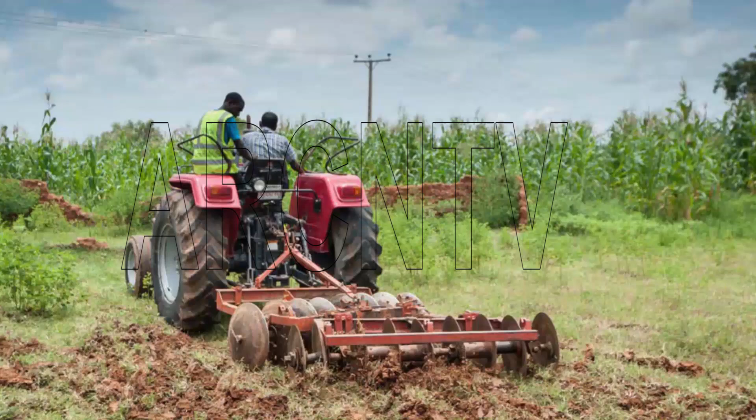You can't drive agriculture without mechanization. It's often said that agriculture is the vehicle, but the wheel on which the vehicle moves is mechanization. So without the wheel, you have to be dragging the vehicle, which is almost impossible to attain.

So when we look at vulnerability to climate change, without mechanization you cannot introduce or make use of precision irrigation facilities, especially during the dry spell that we even experience during rainy season.

If you think that the crop you want to grow is one that doesn't require much water, like melon for example, people grow melon as early as the rain starts. But I witnessed sometime last year that melon even went dry on the field. So it's so difficult these days, almost impossible for you to farm without considering irrigation or an alternative source of water for you to get your best yield.

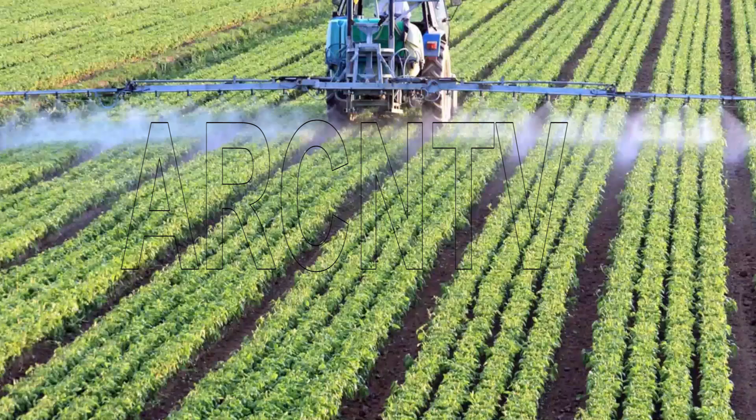And this is why mechanization is possible to tackle the menace of climate change, and the inability to compete in global markets. When you don't mechanize, obviously you can hardly produce for local consumption, not to talk of export markets. So in this wise, countries that have the advantage of mechanization have the upper hand.

And it is sometimes said that the reason for poverty in developing countries is as a result of lack of mechanization. So there's the need for us to be able to produce for local consumption as well as for export, to look at mechanization to tackle this, to be able to compete in the global market.

And I want to look at the high labor costs too. There is always peak demand of labor during peak farming seasons, which makes labor costs very high. But I still look at availability of labor as a hindrance for us to mechanize our agriculture.

Because we still have access to farm labor, that's why we don't seem to be so serious about mechanization. In Japan, the dwindling population of farm labor was what led to the mechanization revolution in Japan then. So just imagine a scenario where you don't have labor to work on the farm - what will you do? Even non-engineers will start to develop mechanization tools and equipment for their farm.

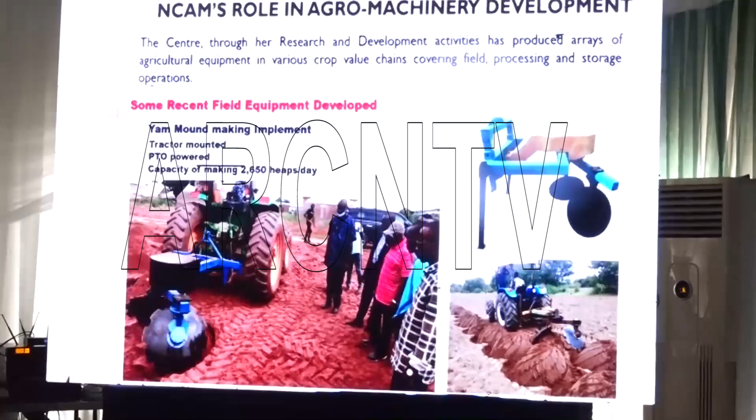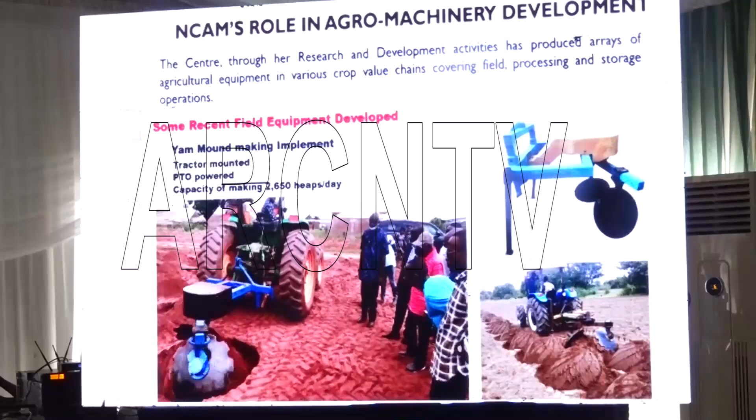This is the yam mound making machine that was developed some 3-4 years ago at the directive of the then Minister, Chief Audu Ogbe, who is from the yam producing part of the country. General Obasanjo saw it on our website and demanded a few units for his farm. We took it to the farm for evaluation, and it was on the farm for hours. He gave us a letter of recommendation on this, as you can see.

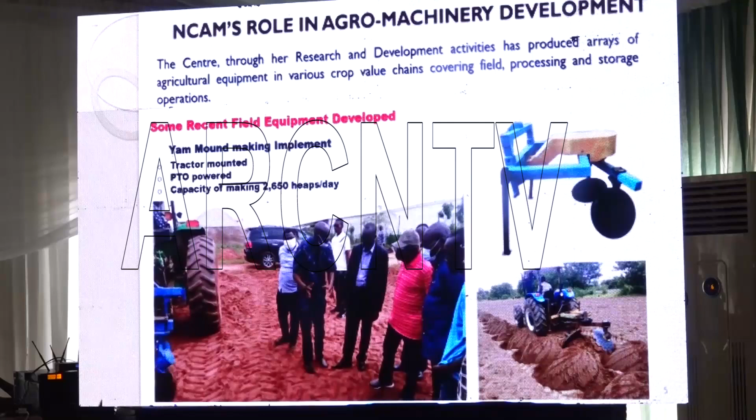Now we have seed planters too. This is the 3-row seed planter, and this is the multi-seed planter. The advantage is having a planter with multiple uses for maize, cowpea, soya beans, sorghum, and so on. So this is the planter.

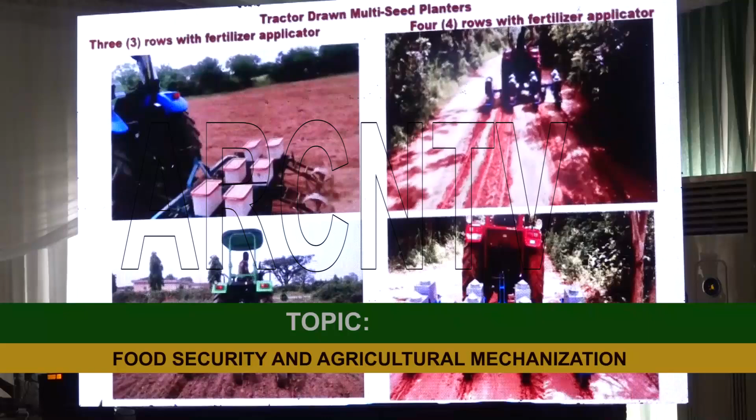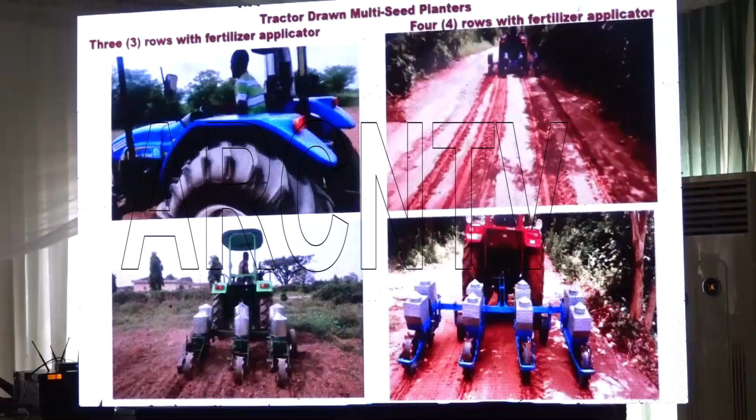We will keep improving on our technologies. And when we extend our technology to you, backup services are always there. Be rest assured that if there's any issue, we are there, and even if there's need to replace such a machine, we are also there.

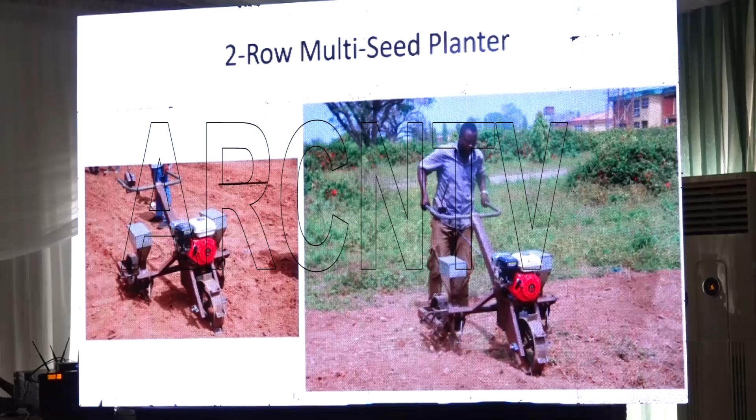For the various levels of mechanization, we have the 2-row multi-seed planter, as you can see, and we have the 15-row rice seeder for large-scale rice farming as well.

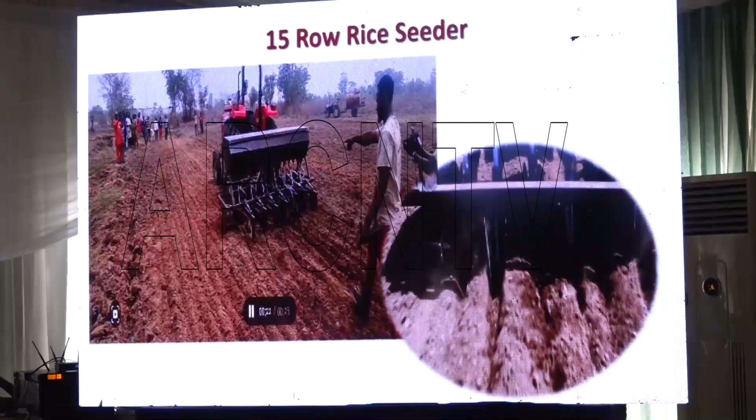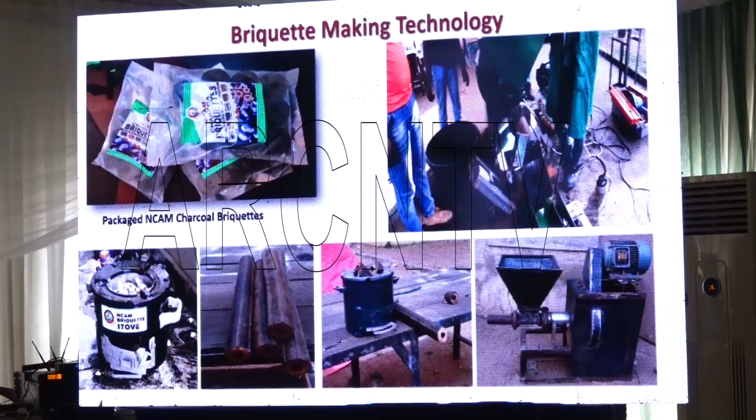This is our briquette making machine, the one you saw outside. Because a lot of agricultural waste is generated during harvesting of crops, and it constitutes a nuisance sometimes, we convert this into briquette, which is a solid fuel. This assists in curbing deforestation where you'd otherwise depend on charcoal from cutting trees in the bush. You can use agricultural waste to generate these briquettes and use them for smoking fish.

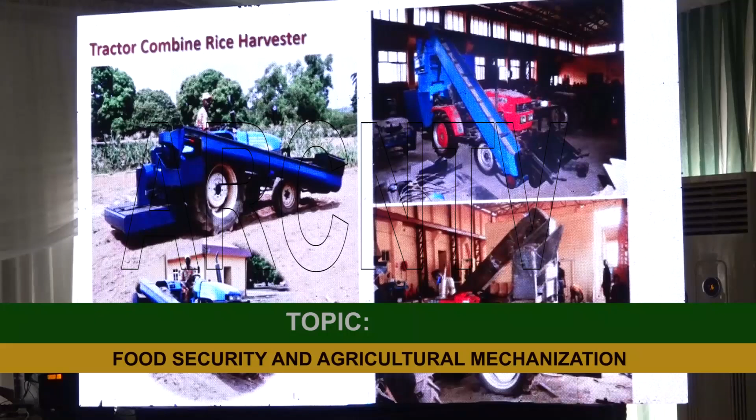Now, coming to harvesting, a lot of people have problems, especially large-scale farms, now depending on imported combined harvesters. We see the challenges with this combined harvester: the technical backup services are not always there, and whenever these combined harvesters develop faults, that is where they end their activities and useful life.

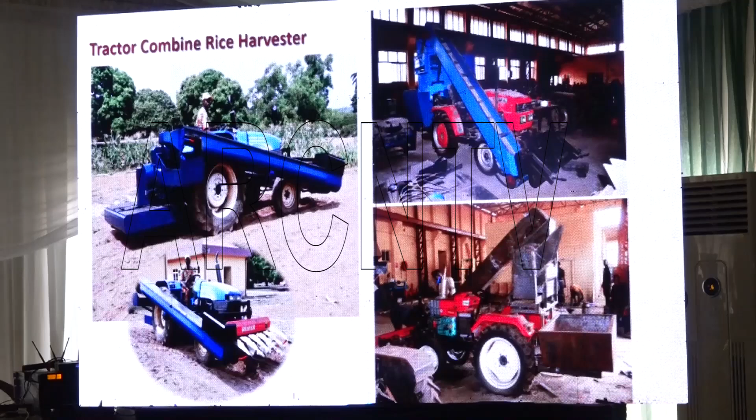So we come up with a tractor combine that can harvest rice just using the conventional tractor, which is easy to maintain and repair. You work the reaper on it, the conveyor, and a thresher at the back. All these other components are locally produced, so the maintainability of this kind of system is well guaranteed compared to the imported, very expensive and sophisticated combine harvesters. This is our initiative on this.

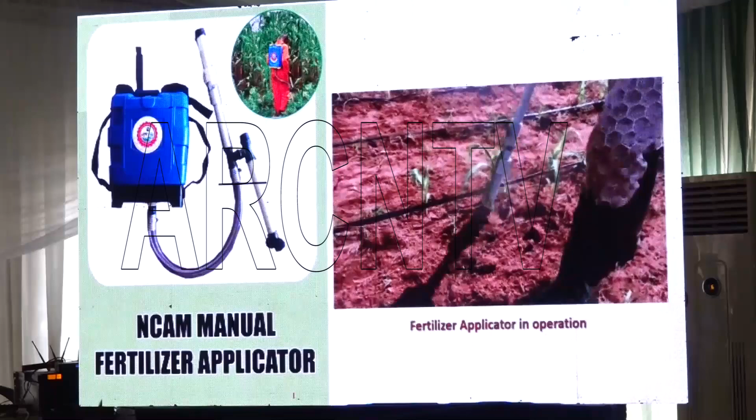This is a fertilizer applicator that at least prevents you from having to bend down to apply your fertilizer. You can adjust the quantity that comes out from it.

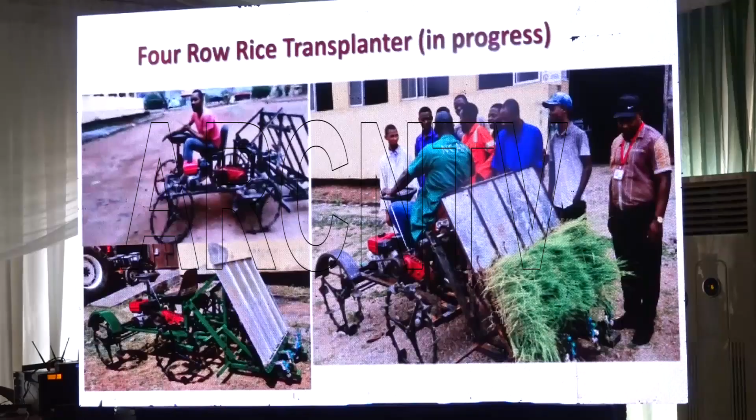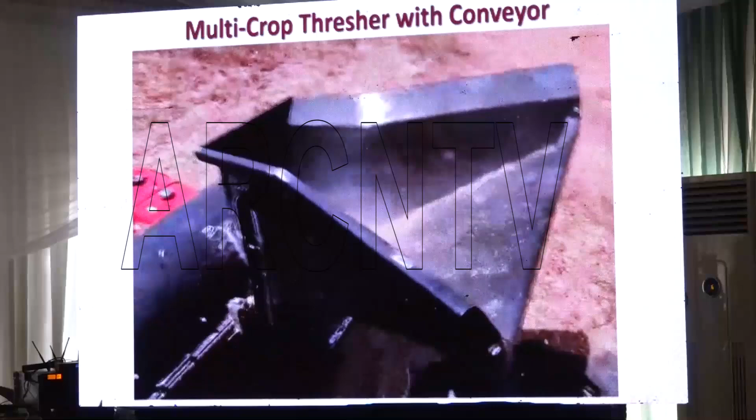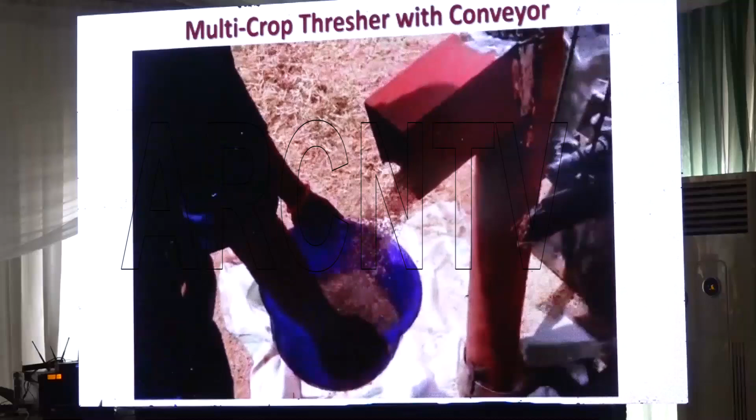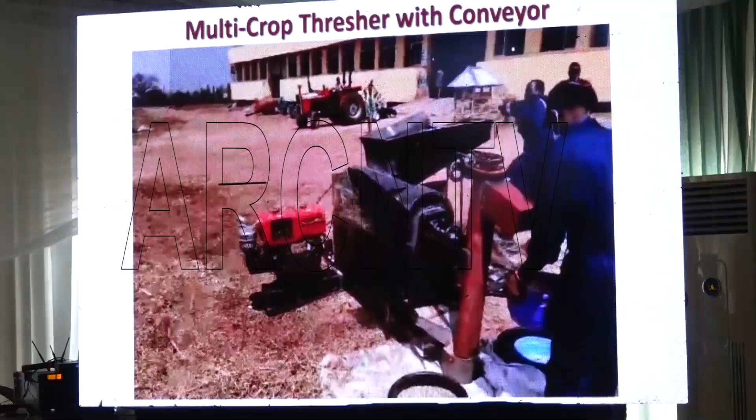Here is the multi-seed, multi-crop thresher. This thresher has the capability to thresh up to 6 different crops, and this is tested and proven. It has the cleaning section too, and also a conveyor that will enable you to collect your seed from a standing position. You can hang a sack there to collect your seed. This can do up to 2 to 3 tons per hour. As it is, we have tested this, and it's already been popularized, and we have demand for the production.

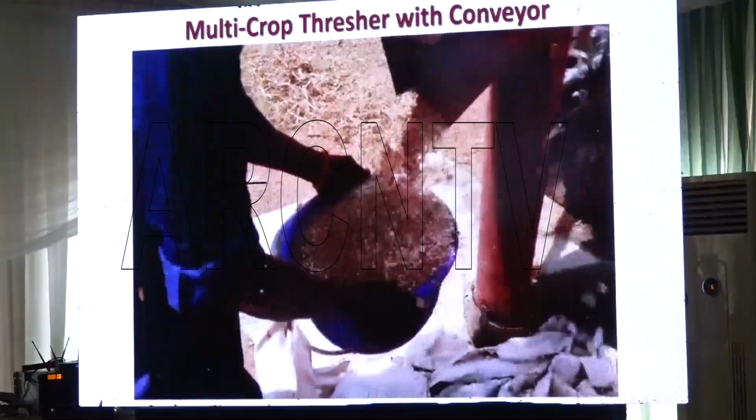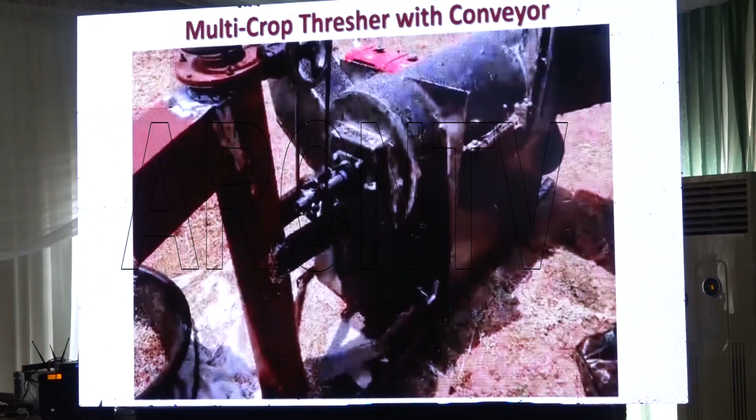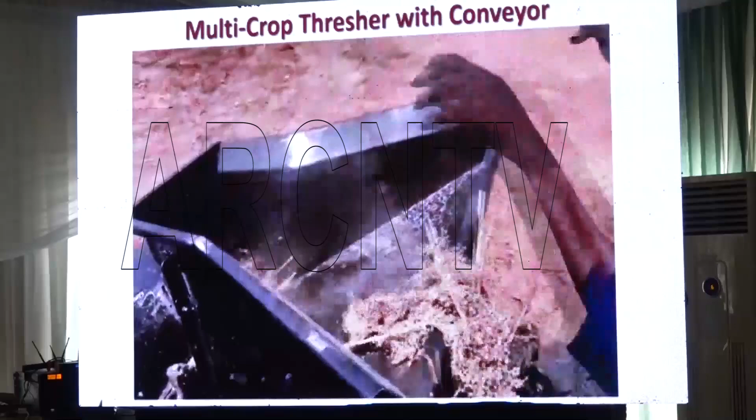It will get to a point that the center may not be able to handle the demand for the production. And that's why we come to training of fabricators across the country, so as to at least make them know how to produce this in their various locations, creating a ripple effect in commercializing these technologies that we have.

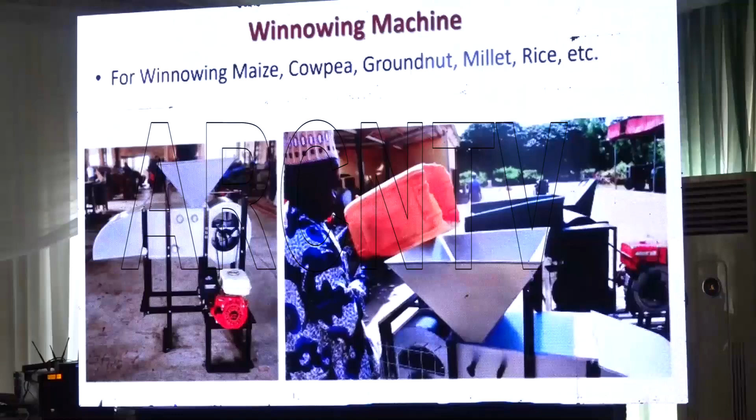Equally started, there's a winnower here that will now add more value to what comes out of your thresher in terms of cleaning.

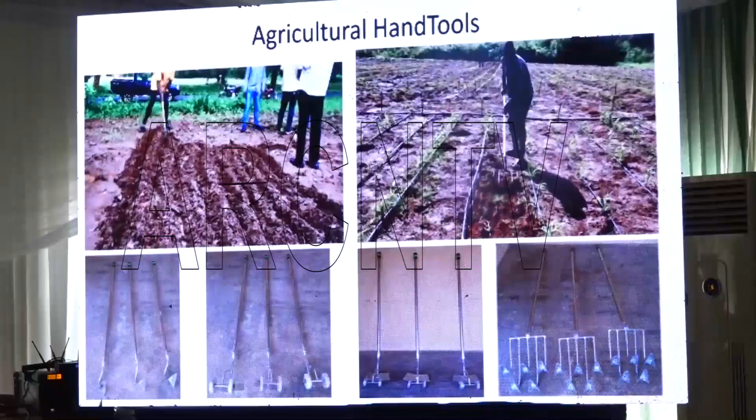Now, in line with the backyard garden initiative by the First Lady, which I think was launched a few months ago, we are looking at these manually operated devices too, simple for small scale farmers. Though it may have its own little drudgery, it's still far better than using the traditional hoe and cutlass for these activities.

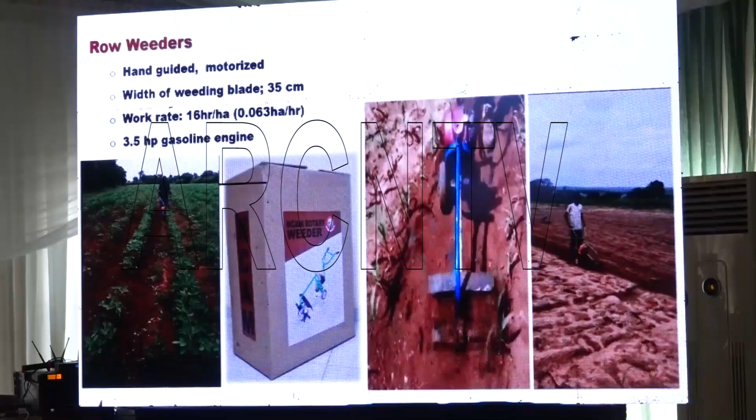So we are also promoting this and making it available to farmers that need it. We have the motorized weeder, of course, if you can afford this one too. Though we have the imported ones too, we are already domesticating this, and you can see the convenience with which you use it on the farm.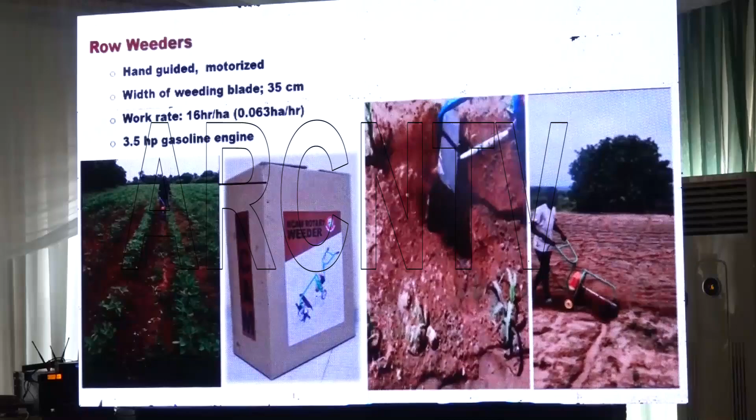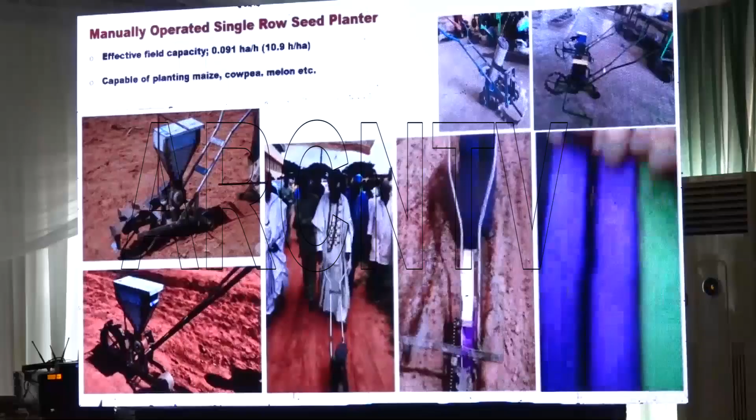We have seed planters, single row, that are manual too, for small scale farmers, and they are also gender sensitive. If an old man can use it, obviously a lady farmer too can use it. And they are very, very efficient as well, and cost effective.

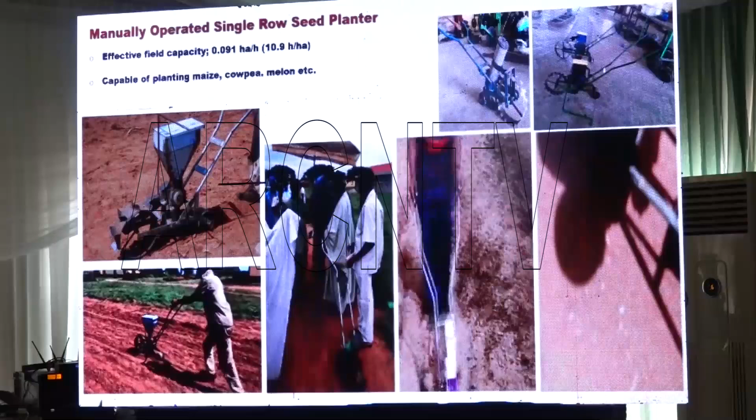Yeah, the soya making machine you saw outside there, it wasn't functional, but that's the second version we made. The first version was produced for IAR&T based on demand, which we produced for the institute, and that's what they are using till now for making soya milk. So the second version is the one you saw outside there too.

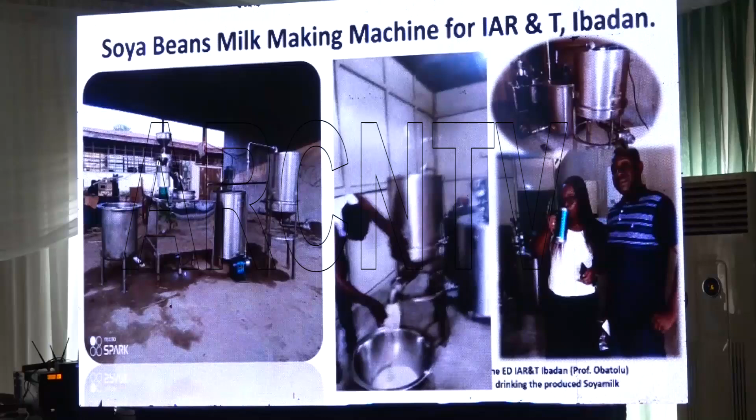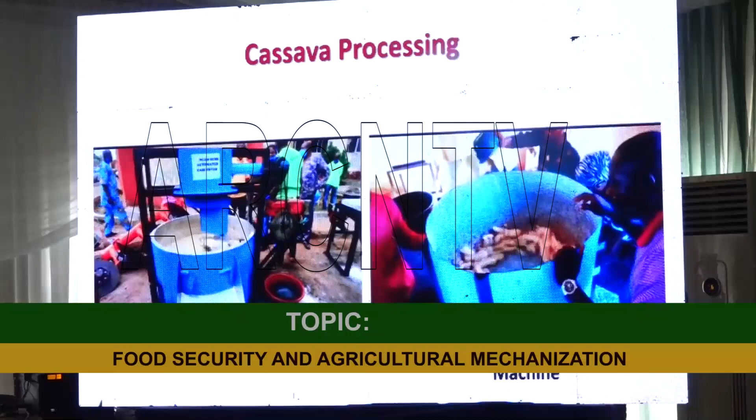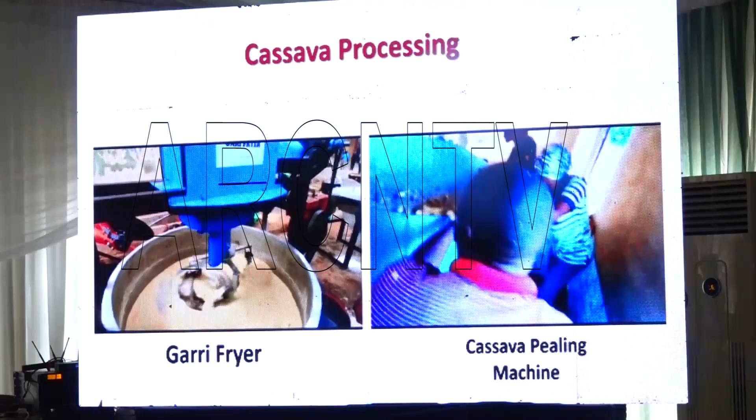So now we also go into processing machines for peeling cassava, fryers, and even complete assembly plants for cassava products, for palm oil products, and also for feed mill. We have complete plants for this.

And this is one of our latest machines that we produce. This is a biogas system for home use. As you know, electricity is becoming so expensive nowadays. This kind of system will carry a small household of maybe 5 or 6, as you can see.

You have the cooking gas there, you have the generator there that can be used to power the lighting in the house, and the whole system is also complementary, whereby you don't need any external power in order to even feed the substrate or to bring out the effluents.

And that effluent can also be used to fertilize your farm. So it's also a very good system for a small, like 1 hectare farm, where you do your drip irrigation to farm, and you have a system like this on that farm. You won't need fertilizer from outside, the effluents you'll be getting will suffice.

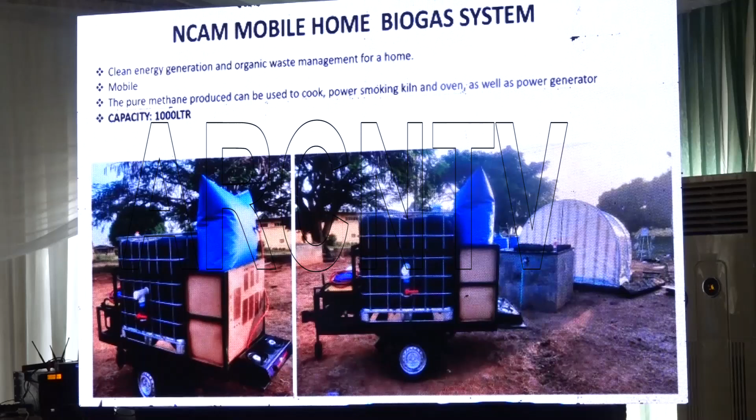And what do you need to feed it as a substrate? If you have a small poultry, or you have a rabbit pen, both the feces can be used to operate the biogas. So it's a very handy one.

The center is the only mechanization center in Nigeria that has the mandate to test and certify agricultural machines and equipment in use in Nigeria, whether imported or locally produced. And that we continue to do. Tractors coming into the country are expected to pass through the center for testing and certification.

This is to ensure they are suitable for use in the country and durable as well, because sometimes manufacturers of agricultural equipment and tractors can lie concerning the capability or capacities of that tractor. So there's a need to verify this, and that is why we advise importers, farmers, and government at all levels to have recourse to the center.

Though we are seeking legislative backing, at this time we are advocating for understanding so that Nigeria will not be used as a dumping ground for substandard tractors and agricultural equipment. So it is good that we mention this here, because this is a serious threat to food security.